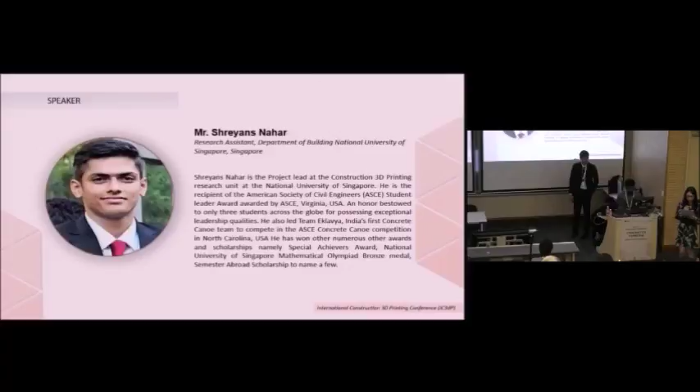Our research is mainly on the development of 3D printing systems to accelerate the production of toilets in India.

Before starting my presentation, I would like to invite our main project lead, the man behind this project, who's also known as the father of 3D printed toilets of the world. Please welcome Mr. Willie.

It's a very dubious title, but I will take it as a term of endearment and accept it. And before I begin, I want to thank NUS and anybody who has helped me from the beginning.

To be quick, I started doing toilets 2.5 years ago, as a way of doing my part to help the cause. I'll be quick about it — we started using bricks, the regular cliche brick and mortar business. We were doing 1 or 2 toilets a day. Slow, but it served my intents and purposes.

Then after that, we moved on to precast panels. Again, labor intensive, but again, it served its purpose.

So finally last year, roughly April, I got really tired of the words 'disruptive technology,' and I decided to say, let's see if I can disrupt the construction industry and try to 3D print toilets. Because at the end of the day, if you look at the toilet, it's 4 by 4 by 6, non-structural. So in my mind, that's a perfect 3D printing project — it's non-structural, it's simple, let's give it a try.

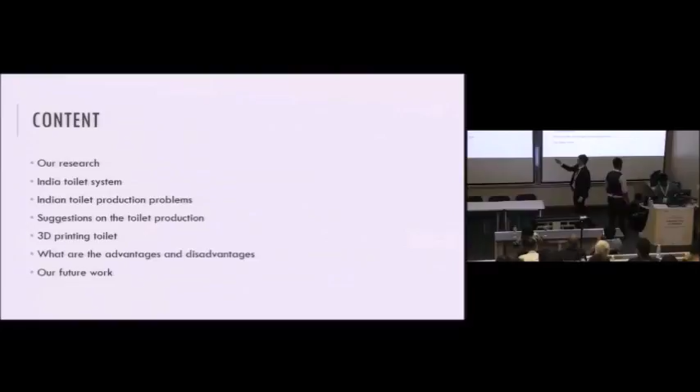So, first up, our research is basically, we start off with our research, then the Indian toilet production problems, the suggestions on the toilet production, 3D printing toilet, what are the advantages and disadvantages of the 3D printed toilet, and after which we go into our future work.

Well, what is open defecation? This is not happy to say, but yes, it's one of the critical issues in India right now, wherein our Prime Minister Modi had played a huge role and is still continuing to improve the sanitation facilities, the open defecation facilities in India.

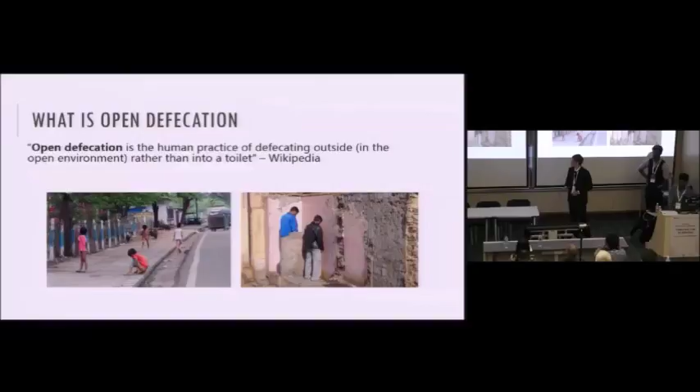Open defecation in India, well, India stands somewhere 13th on the list in the world, with plenty of African nations before that. But why exactly India? Because of a simple aspect, the Indian population. India's population is around 1.3 billion people. Statistics from WHO about 4 years ago state that 626 million Indians still open defecate. Something not to be proud of, but that's why we're researching on this. After that is Indonesia, with just about 63 million odd people.

Our government has spent over 30 billion US dollars and promised to build 90 million toilets, of which I must say, not completed yet.

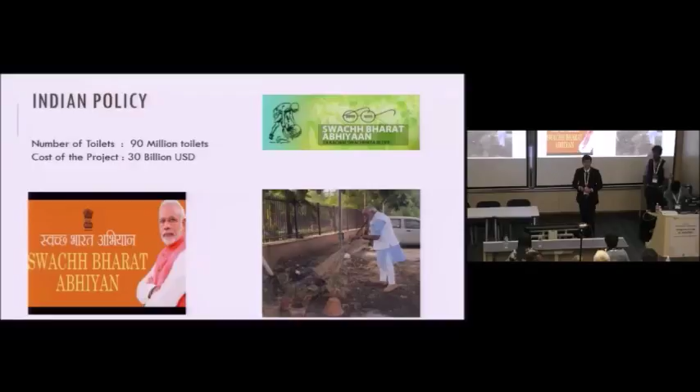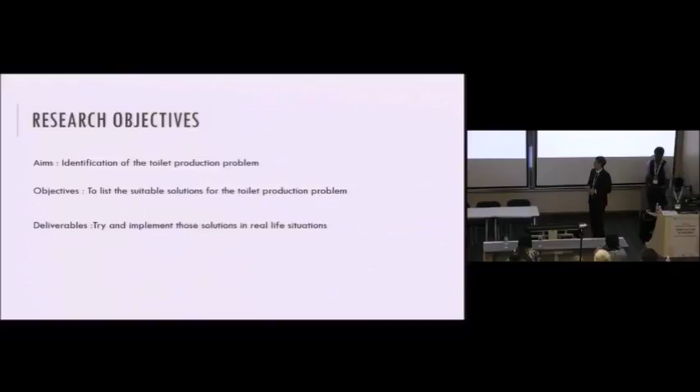Our research objectives are identification of toilet production problems, to list the suitable solutions for the toilet production problems, and try to implement those solutions in real life situations.

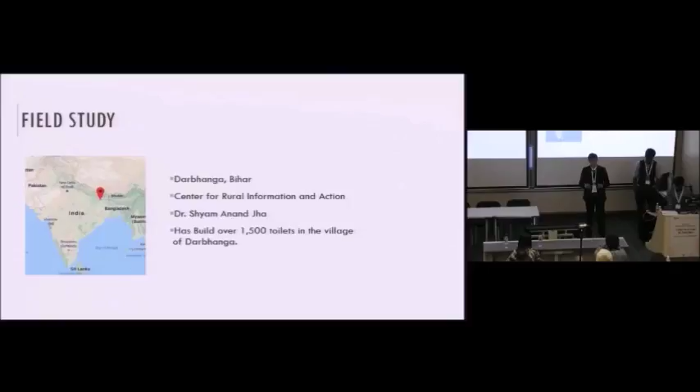So we have taken two field studies. One is right up in the north of India, the northeast, which is called Bihar province. And a second one is right down south, nearly 2,000 kilometers away, in Tamil Nadu, India.

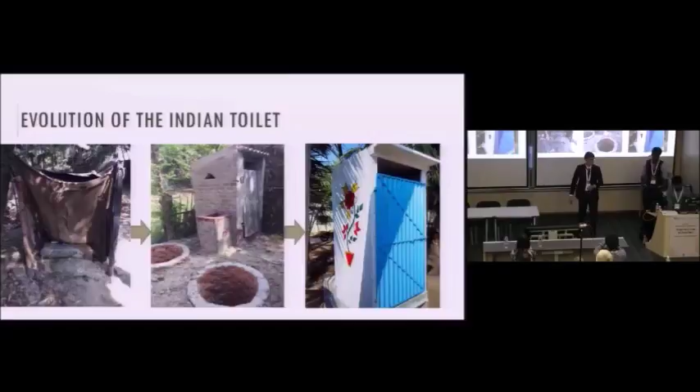Evolution of toilet: yes, the Indian toilet has evolved, but not with time. That's 2015, 2016, and 2017, and still not moving ahead. So yes, a huge problem again.

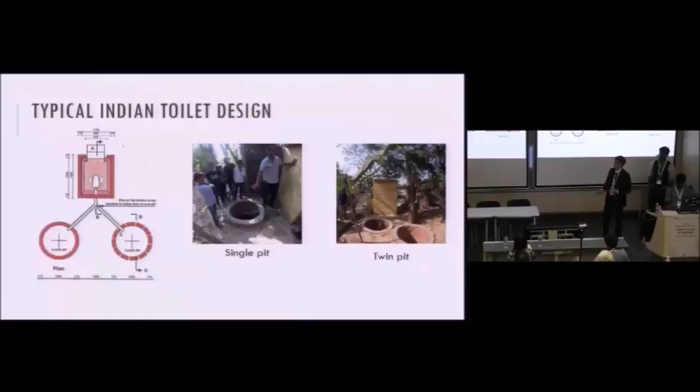The typical Indian toilet system is a low-cost toilet introduced by the Indian government. It has 2 pits where you can see the waste materials go into one pit and the other pipe is blocked. After which, say 3 years or so, the pipe is opened and all the feces are collected, and the other pipe is blocked after that. So we just wait for one pipe to be filled in while the other pipe is blocked. As you can see, that's the pit over here.

Yes, the production process of the Indian toilet is basically the brick and mortar toilet. Indians, and especially the villagers in India, are usually not aware of precast or prefabricated options, so they still stick with the brick and mortar toilet.

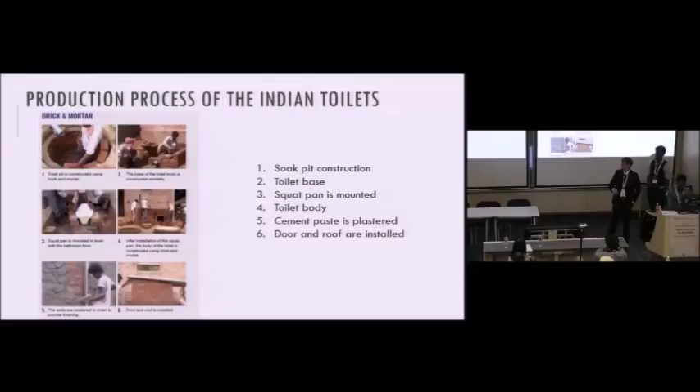As you can see, people start off making the soak pit, which is the collection tank for all the waste materials, and then they go on to make the base. After which, the squat pan is mounted on a level where the base is also flat, and then they build the body of the toilet and the roofing in the end. So this is the typical production process of the Indian toilet.

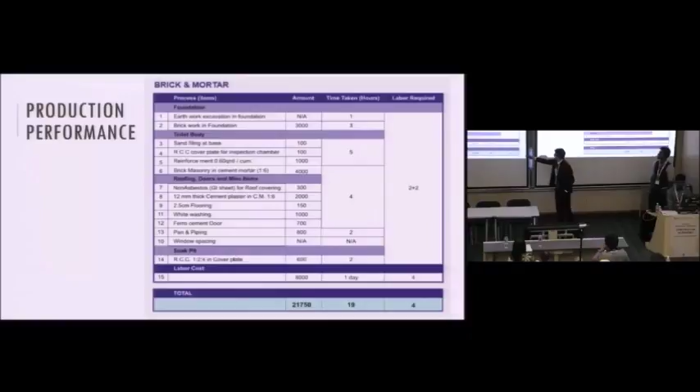The production performance: this is the time, cost and quality analysis. I think many speakers have asked about this. So yes, this is the typical brick and mortar toilet, which costs about 21,750 Indian rupees, roughly coming up to 300 US dollars. The labor required is about 4 people or so, which takes about 19 hours to build just one toilet. The business model in India is probably the most complicated one ever, because the money that goes to the individual households is not easy.

The government just doesn't give the money so easily, so it has to go through a lot of process, which takes about 6-7 months to reach the consumer's hand, which is a very tedious process. Even if we try to change it, the government has to change its mind first.

Yes, so the individual household applies for funds, and then it goes to the government. Then the government sends in the funds. Then these are given to the contractors. And it goes in a huge cycle, taking about 7-8 months just to receive the money eventually.

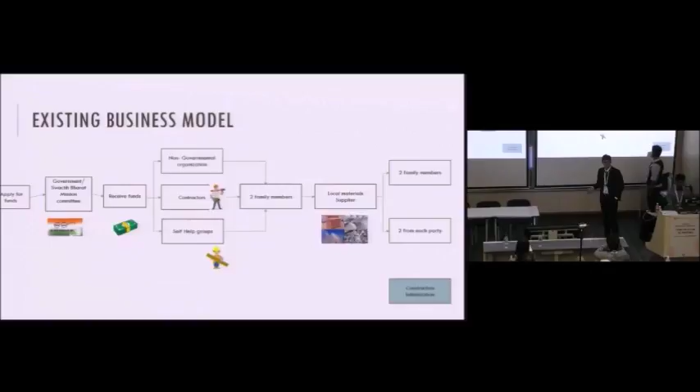So what are the Indian toilet production problems? Well, when we went to India, we saw 3 major production problems, which we put into 3 different categories: the design problem, construction problem, and operations problem.

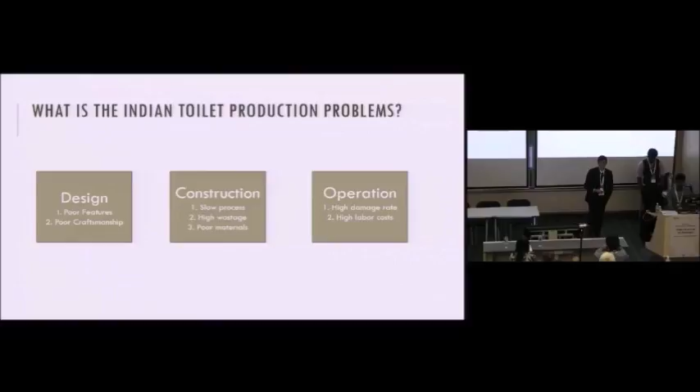The design problem, quite simple, we could see it. Construction problems were the ongoing toilet constructions, and for operations, we had to ask the contractors how exactly the whole materials operations and the fund operations travel in India, which is a huge issue as well, because the contractors are not ready to give you the right amount - they sometimes hype it up.

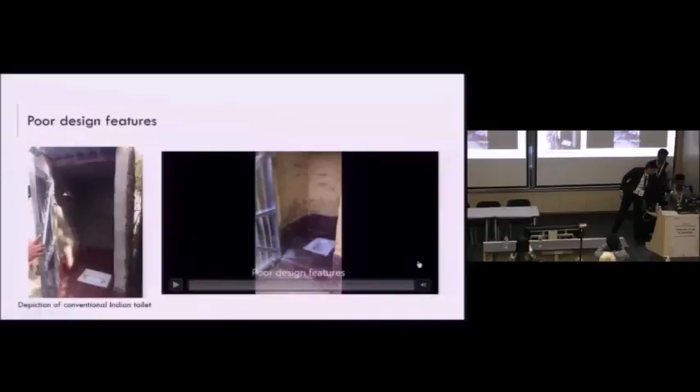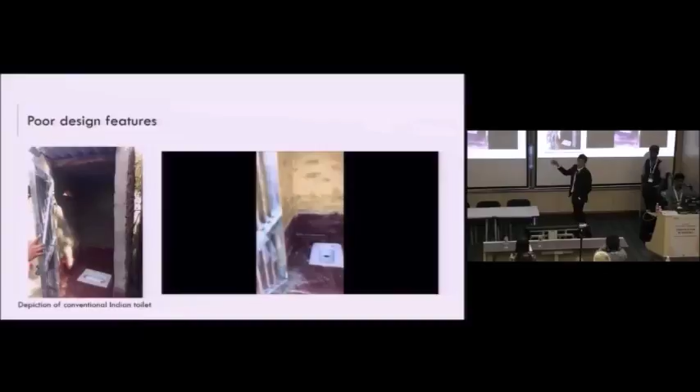So yeah, the poor design features, as you can see over here. This toilet is a typical brick and mortar toilet in India. It has poor design features, meaning it has no ventilation at all, and has very little space, as you can see. So this is the next one, please.

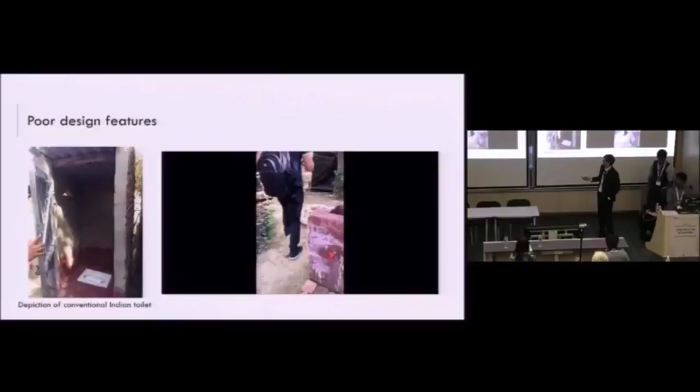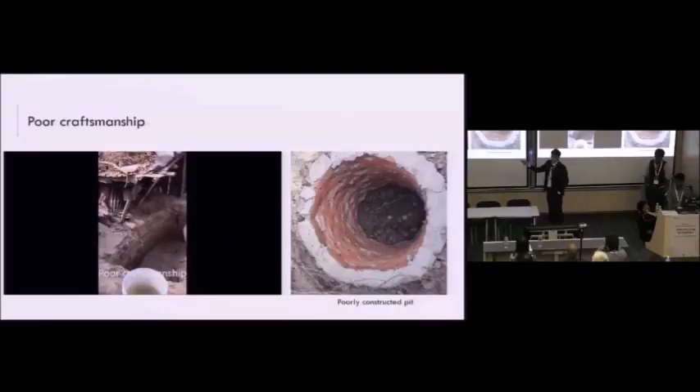Poor craftsmanship. There's a laborer who takes in water without any specific measurement given to him. He just takes some water and throws the concrete. That's again poor craftsmanship, and as you can see, the finishing is quite bad.

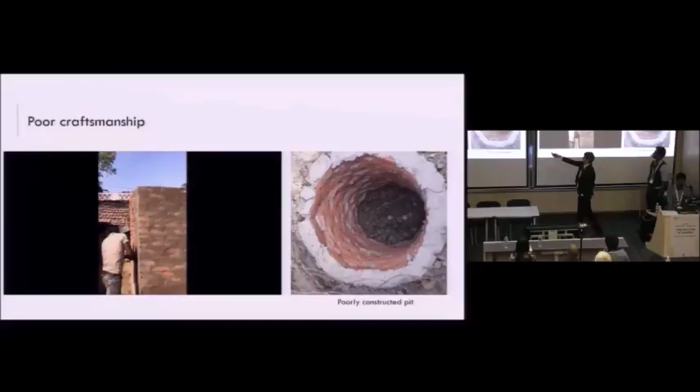It was surprising, because when I asked them how long each toilet lasts, they said not more than 2 years.

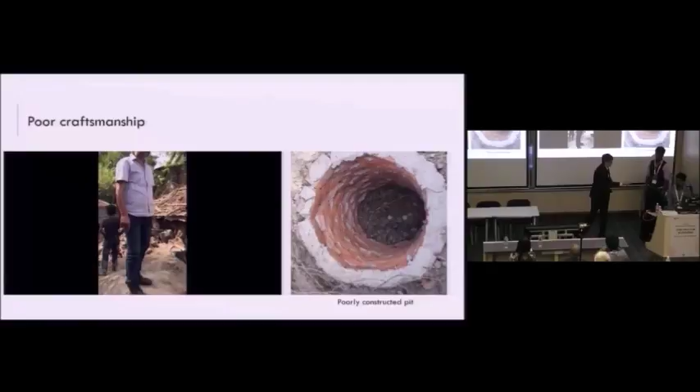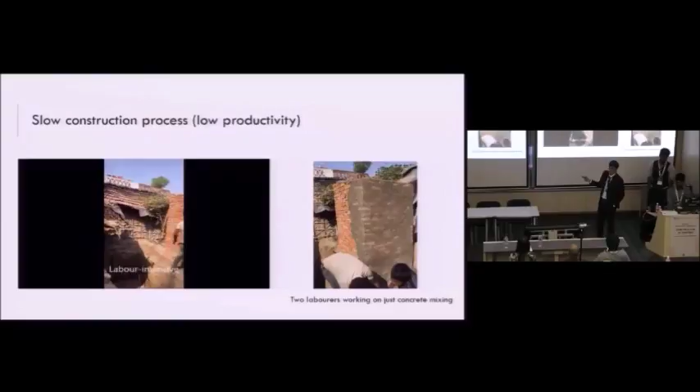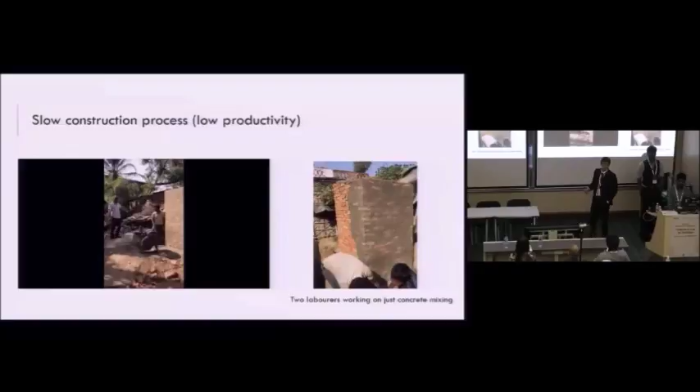Slow construction process, where you can see one guy actually doing the finishing, but it's not only him involved. There are 5 others who are just watching him build the toilet. So overall there are 6 people, but 5 are just watching and one guy is doing the finishing.

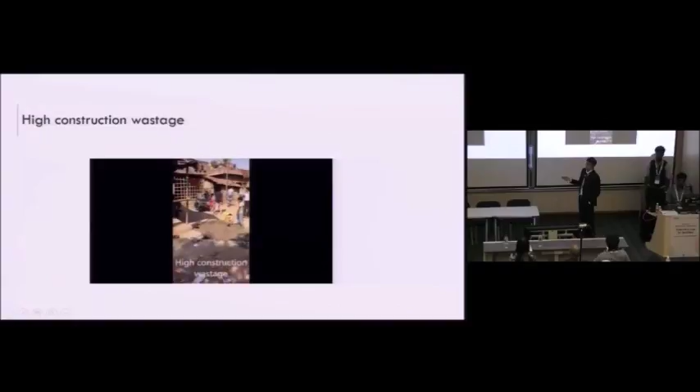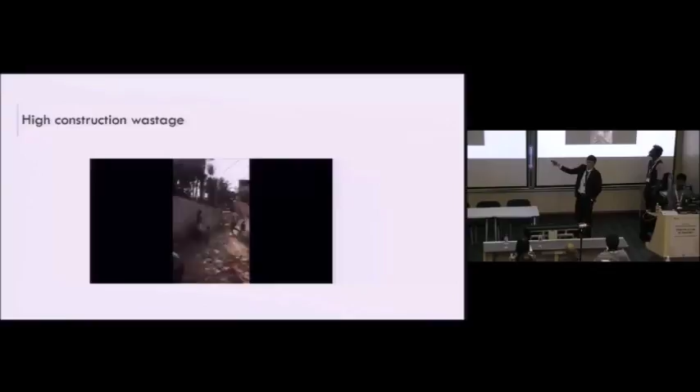High construction wastage, indeed we're known for that, which is quite disheartening. Right there in the video, caught live on tape, they're discussing it, and 40% of bricks are being wasted for no use.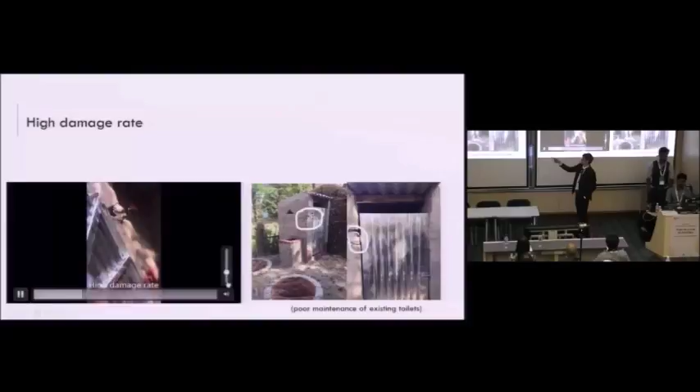High damage rate, an amazing shot. Right there, that's the door. Can you replay it? Yes. There's a door which is damaged. I don't think it lasts even for 2 years now.

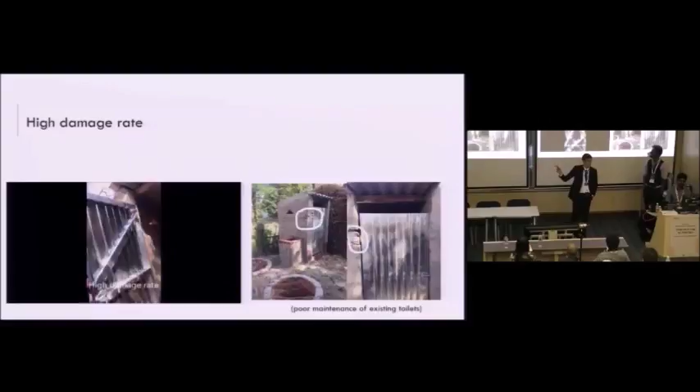Next, other problems are simple, like the labor and the poor materials involved. My colleague will give more explanation on materials since he's researching that as well.

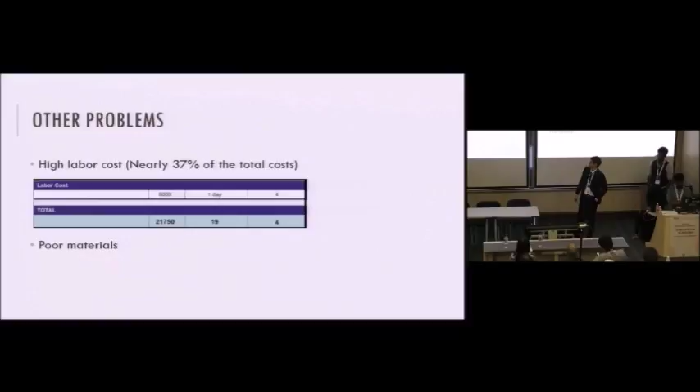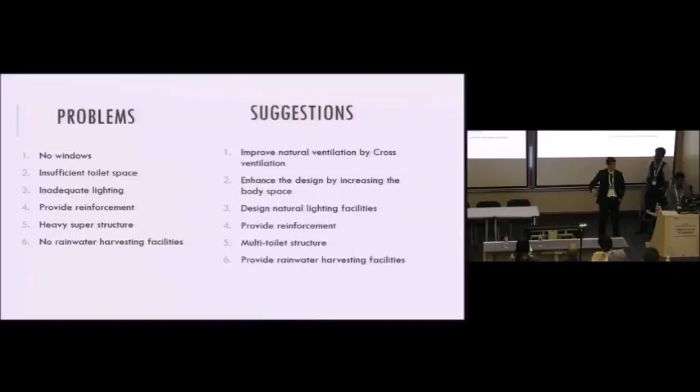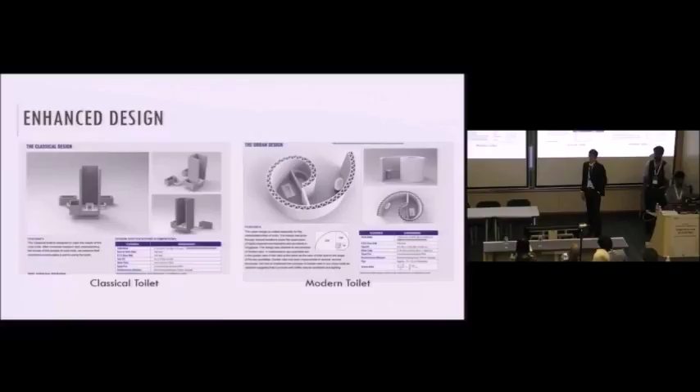We had given a few suggestions on how to make the whole process better. We thought of two things: a classical toilet and a modern toilet. Classical for villages in India, and modern for major cities like Mumbai, Chennai, and Delhi. So we started off with our classical toilet.

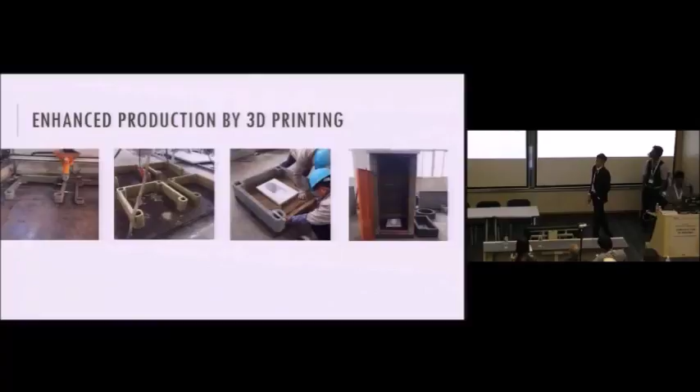We have already printed it. If you guys had come to the lab for the opening ceremony, these toilets are already there, up and running. Our design of the 3D printed toilet is purely based on real life situations.

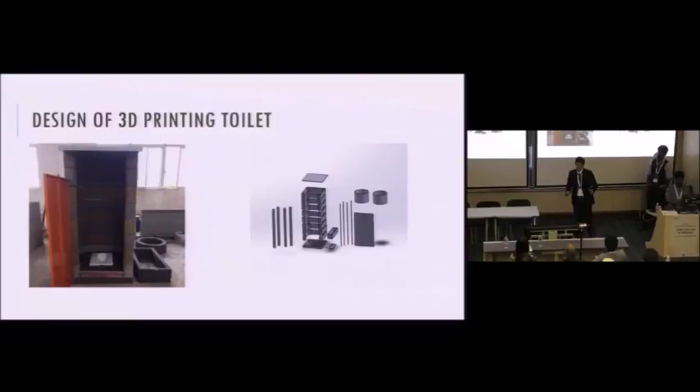We thought, why can't we make a Lego block out of it? So we did it in multiple pieces. The whole toilet is built from about 14 pieces so that it's portable, and villages are ready to use it.

This is the production process of the 3D printed toilet. As you can see, the printing is happening right there. The second photo shows the reinforcement—meaning the laborers or household people who will use the toilets can carry it from one side to another.

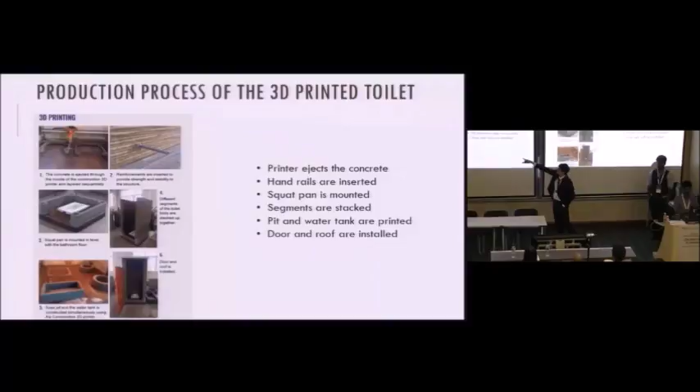India being highly labor intensive, they are ready to carry that. Then the soak pit is put in, and all these parts you see in the first photo are being stacked together. The fifth part is where we print the pits and the water tank.

This is the production performance of the toilet. The whole printing process—not counting the calibration failures we had, and we failed a lot—took about 6 months to get on track, and we are still failing today.

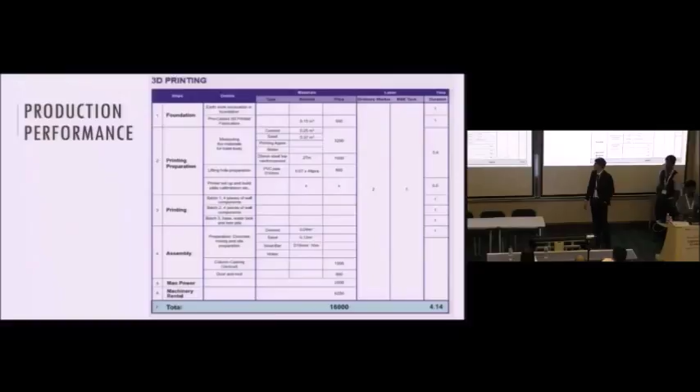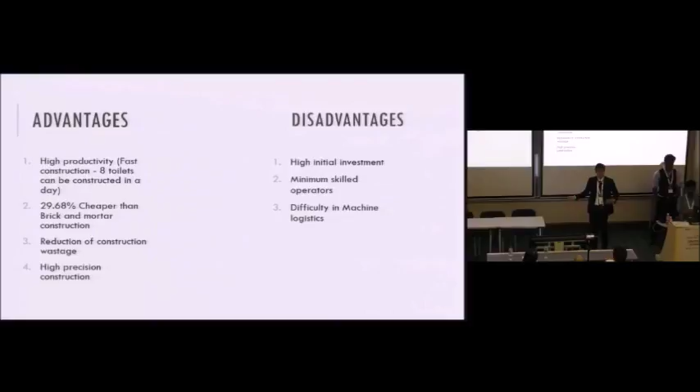Advantages and disadvantages—obviously I've hyped it up since it's my project. The advantages are high productivity, 29.68% cheaper than the brick and mortar one, and reduction of construction wastage, as you can see over there.

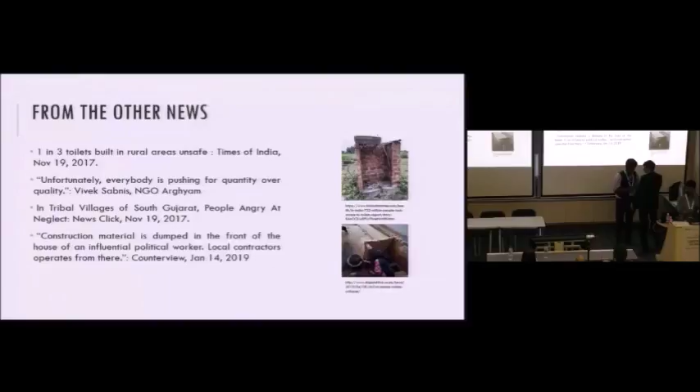From the other news, over to my other colleague Shravan, who would go on. Thank you, Shreyans. My voice is clear there, right?

As a material department lead, this problem was not a big one for me. The toilet as such is a non-structural unit, so making a material that's 3D printable was not very challenging.

But one fine day, I got a call from Jackie and Williams saying they wanted the material to be lightweight and cheap. Those two words actually changed my day. That's when I went to India and did a background search on how to make this material cheap and lightweight.

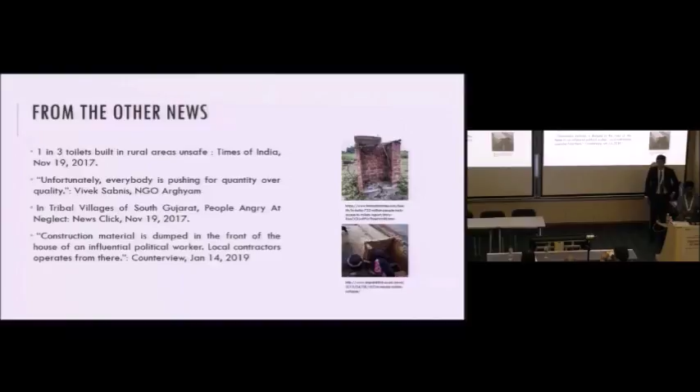So these are the exact clippings from newspaper. These are the headlines, which say that the problem was true in India.

Then I went on site and saw why there was a design failure in Indian constructed toilets. I mean, why toilets were breaking on the second day of construction and the third day of construction.

Then when I did a material point of view analysis, I found that these were all criteria which they were not following properly. For example, water to cement ratio was not fixed.

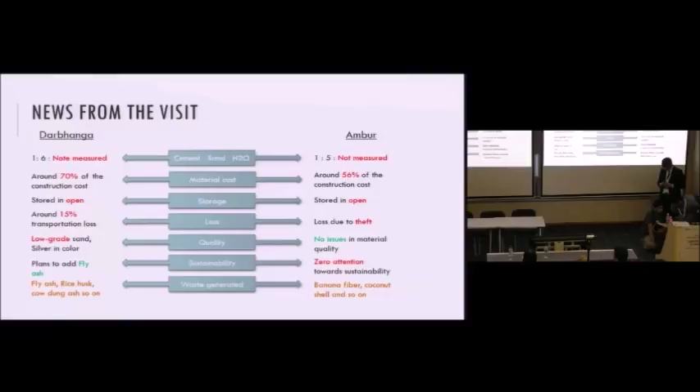Cement, which is supposed to be a good binding agent, has to be stored in a really good storeroom. Cement binds because it reacts with water and hydrates, creating a binding link. So it should not be kept open. If it is kept open, it will be pre-hydrated, thus reducing the whole quality of the structure. But in India, there was no designated storage room for the cement.

So after going through this analysis, I came to know that I have to change everything from the start. I can't use their techniques and do some material development. I have to start from the beginning.

That is when I wanted to use a new material, one which can make the whole toilet structure cheap and lightweight. How can you make any material cheap?

You recycle the waste. So when we went to Bihar and when we went to Tamil Nadu, we found one thing really common: everyone eats rice. Everyone from India eats rice, even though the culture changes drastically from north to south. So for me, that was the material I wanted to use: rice husk ash.

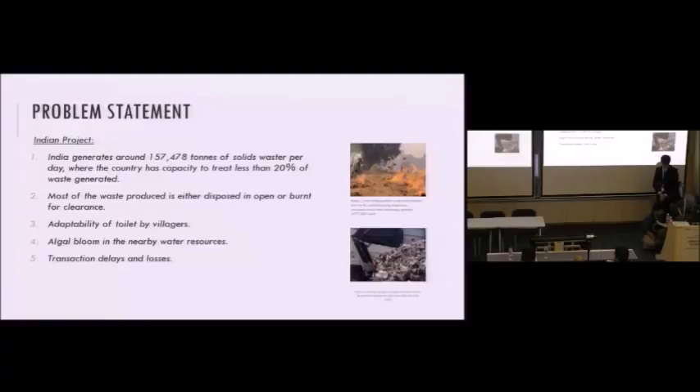So he is the director of SBM. SBM is nothing but Swachh Bharat Mission. It is a program directly under the Government of India, which takes care of the sanitation problem in India. He says that you create a toilet, it's okay, but it has to be adopted by the people.

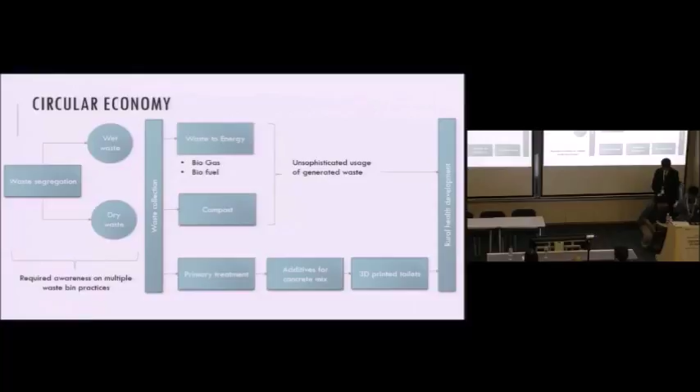That is when I came up with the term circular economy. Circular economy is, I want this toilet to be created by the person who is using it itself. I want the people, for example villagers, to collect waste for me, process it, and I use that waste to construct the toilet. And let them know that this toilet is constructed by you, so they will be more adapted to the new system of toilet sanitation.

Okay, so because of the time restriction, I'm just skipping a few slides. So rice husk, as I said, I chose rice husk because it is majorly produced in India and we can get it really cheap. This rice husk can be used in 3 ways: either use rice husk as it is in the material, or convert it into ash, or convert it into biochar.

The difference between ash and biochar is, ash is made by open burning, while biochar is made in a controlled environment, meaning the oxygen is not there, which is pyrolysis.

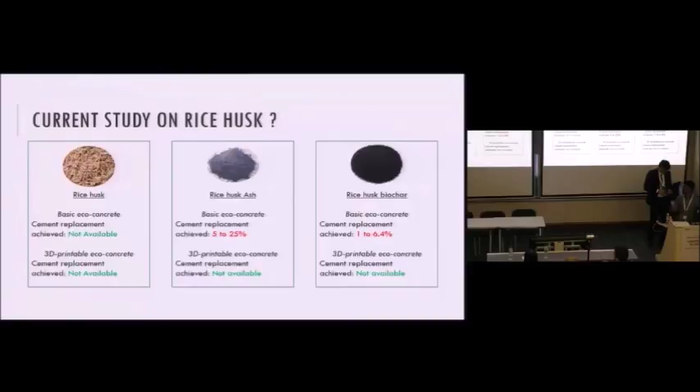So yeah, these are all technical terms. I did compressive strength analysis and found that when you replace cement with 5% rice husk ash, 10% rice husk ash, there is an increase in compressive strength.

Good for us. But there was a problem with rice husk biochar. In rice husk biochar, the equivalent increase in compressive strength is not as promising as rice husk ash.

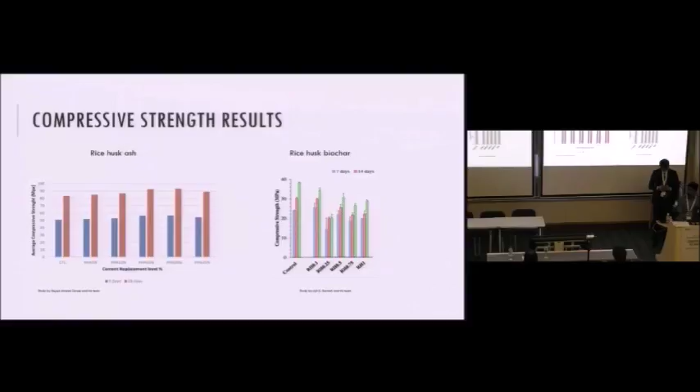Same goes with splitting strength test, and same goes with flexural strength too. These are the 3 very elemental tests you have to do to say whether this material is good enough mechanically or not.

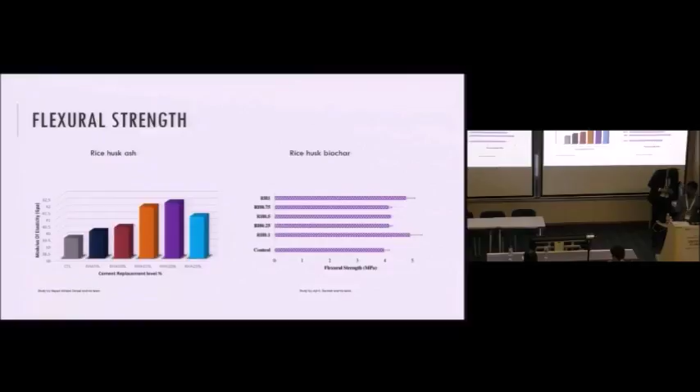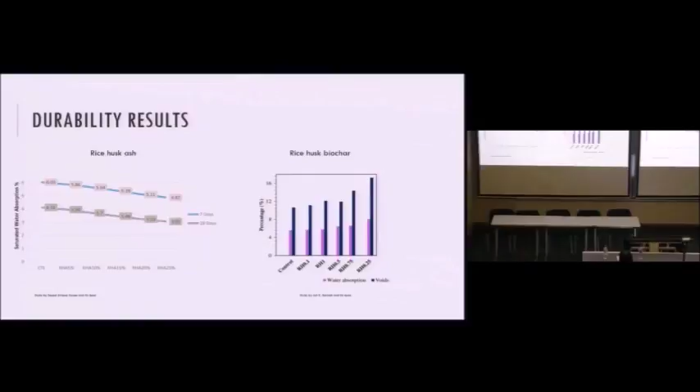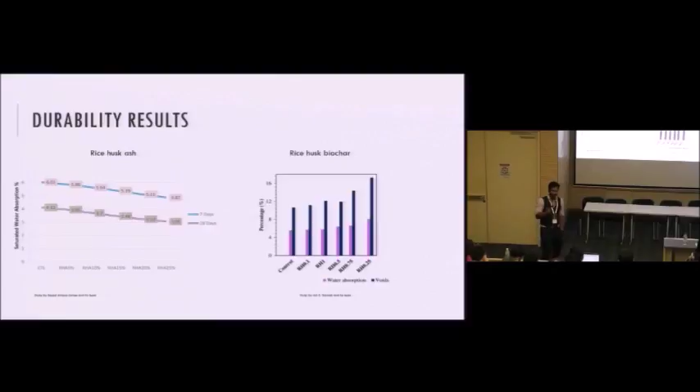Durability test is apart from mechanical test. I had to do this because toilet construction anyhow has a huge area where water will be seeping inside the blocks, so we have to see whether this whole toilet is durable enough or not. With this durability study also, you can see that when you replace cement with rice husk ash, the durability increases.

So we met the CEO of Jivika. Jivika is a government body which takes care of the water and sanitation facility in Bihar. We also met the district magistrate, and even the Tata Trust representative. Tata Trust is a big organization in India which takes care of all big construction processes.

And we got a special invitation from the Prime Minister of India to present our work in front of the public. That public was known as Swachhagrahi. Swachhagrahi in India means people who fight for cleanliness.